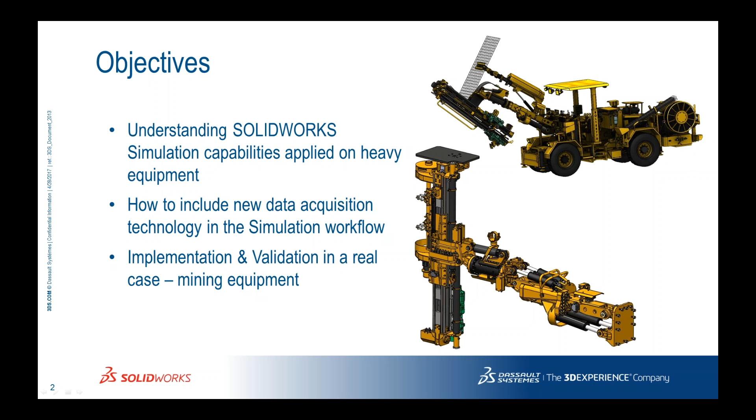We will analyze an example from Resemin. Resemin is our customer in Latin America, and Jose will present the platform and all the facts that the customer has developed with him. I will talk briefly about fatigue and fatigue inside simulation, then we'll hear directly from Jose.

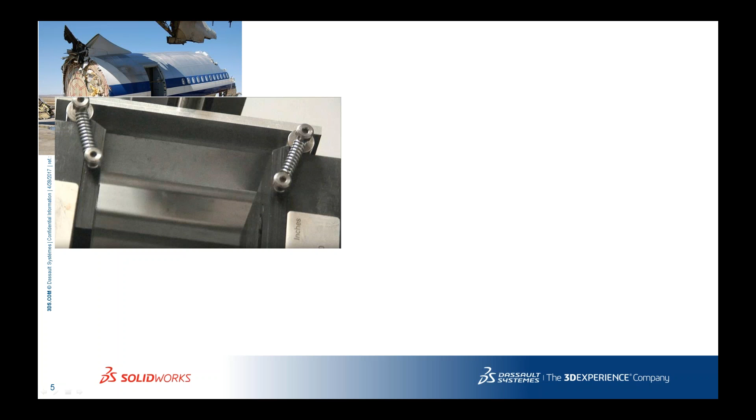Let's talk about the fatigue failure, the fatigue phenomenon. Basically, fatigue is an old problem analyzed back maybe in 1960. It's about failure after some cycles, after many cycles, in a steel structure. It was first analyzed when the first planes were having problems on the window because of the shape, and they developed a crack after some cycles, the cycle for a plane being about landing and taking off. But it's also related to machinery.

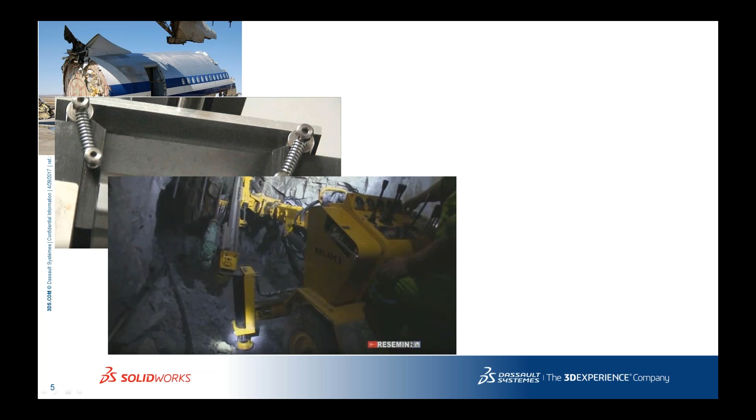Machinery, as in this example, what Resemin does, is about mining equipment. There are two main questions: how to simulate fatigue failure, and which are the locations of the fatigue. Of course, it's also related to time, to the cycles, how many cycles will develop this kind of fatigue. So it's very important to understand the real loading excitation.

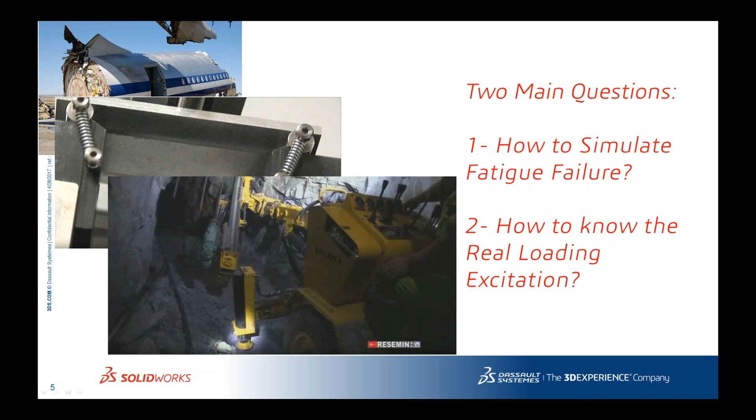Talking about Resemin, they are developing mining equipment for bolting, for making a tunnel secure. With these steel cages, they are bolting long bolts inside the wall, and basically they are drilling a lot of holes with this machine. When drilling, there is a lot of vibration going on in the steel structure, so there is a lot of issue with vibration and fracture of the main boom.

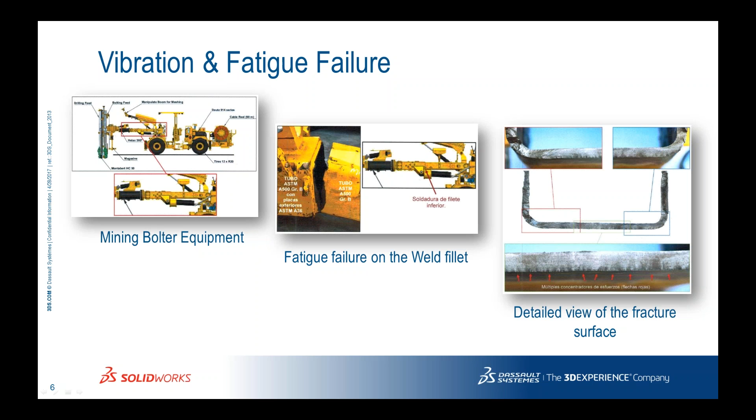It's called a boom, and there is a lot of fatigue problem that I have to solve.

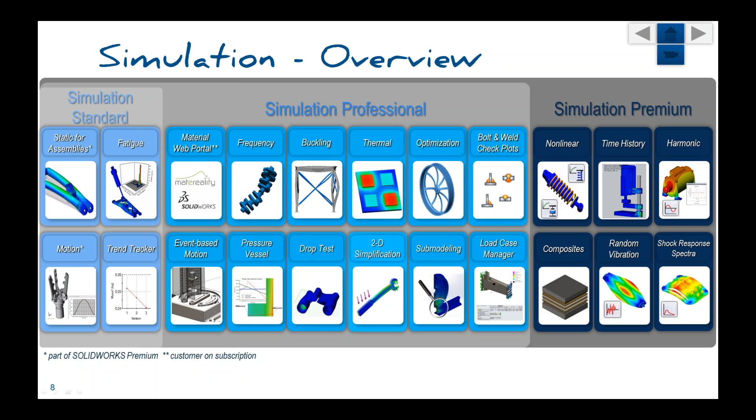In Simulation, there is a specific module for fatigue analysis, starting inside Simulation Standard. It's the very first package for simulation, and it's related to the Matereality Web Portal, because for customers on subscription we have more than 100 materials with the SN curve, called the Wohler curve, for addressing fatigue.

Fatigue analysis in Simulation Standard is very simple because it's based on the SN curve. It's very easy to use, as I will show you in a moment, and it's based on high cycle fatigue behavior. Basically we are addressing this problem when we have at least 100,000 cycles on the component, and we can get back a damage plot and a life plot.

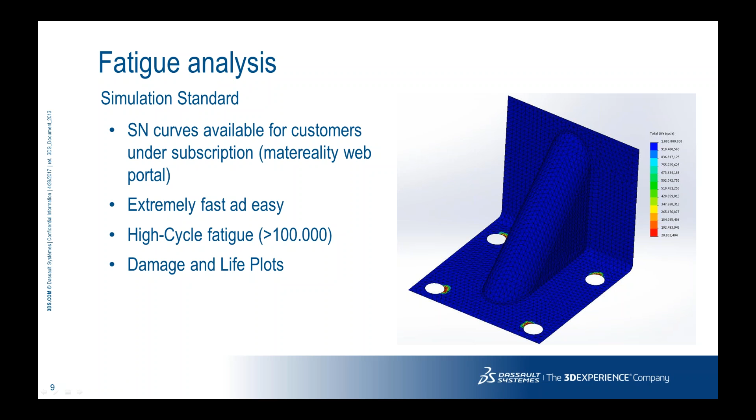For a simple case, fatigue is based on alternating stress loading. The first one is very simple, fully reversed load, about having the same load applied in one direction and then the other, cycle after cycle. The second one is pulsating, so basically we call it R equals zero, R0, because you apply the load and then remove it, cycle after cycle.

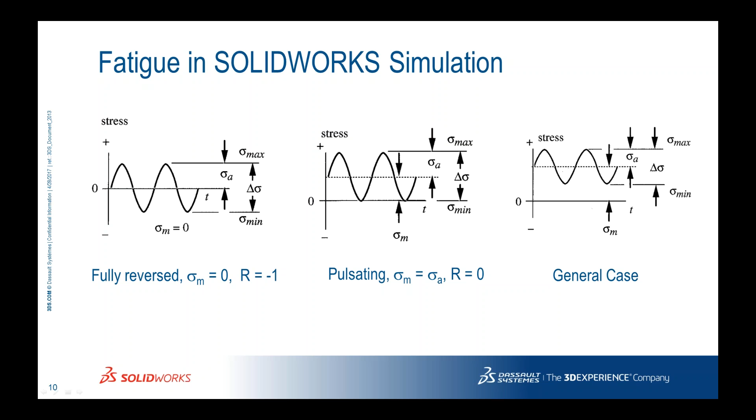We can also address the general case, the dead load, which is a static load plus an alternating stress. This is called constant amplitude loading. Of course there is a more realistic situation with variable amplitude loading, which we will see in brief with Jose and the case from Resemin.

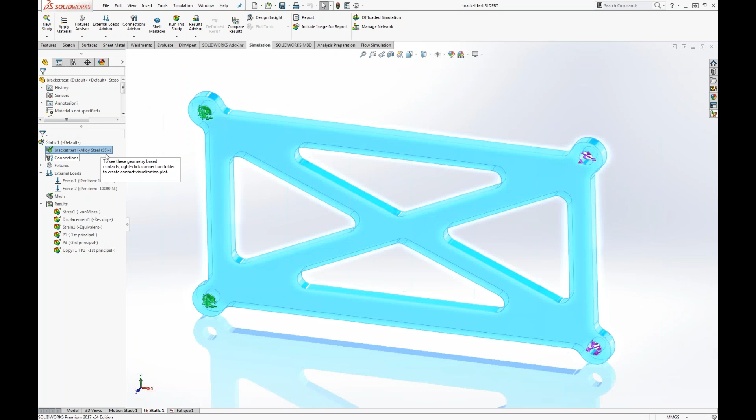Talking about fatigue analysis inside Simulation, let's see quickly the elemental analysis we can do. First, I have a bracket here supporting some load for some components, and here you can see just a static analysis. We have applied steel, basically an alloy, and we have two forces here, shown in purple.

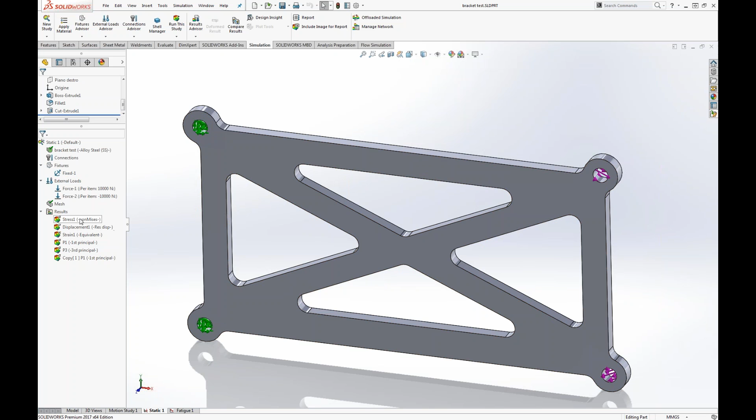It's very simple: one force is tensile and one is in compression. We also have a fixture here, you can see it's fixed, so those points, those hinges, are fixed. We can check the plots, the results, for example the stress, so it's quite intuitive to understand what is happening here.

I'm applying this load and this is the resulting stress, which is a von Mises stress. I can also see P1 and P3, the conventional maximum tensile stress and maximum compression stress. P1, of course, is tensile, and you can see it is mostly due to this point.

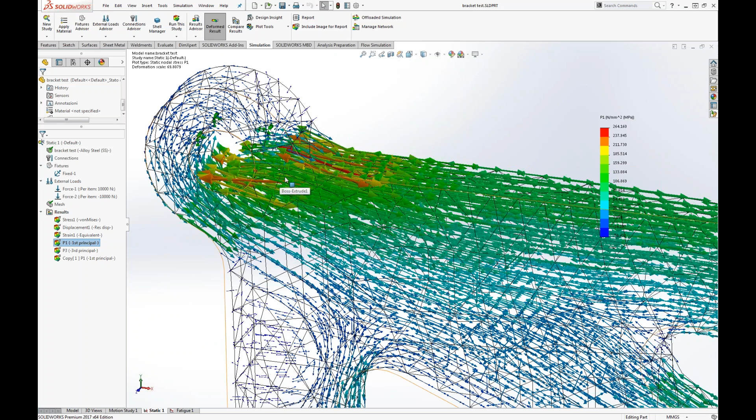Also, if we go to the third principal stress, the compression stress, you can see on the contrary, it's mostly on this point, on this location. Why is this important? Mainly for fatigue, the behavior is depending on tensile load.

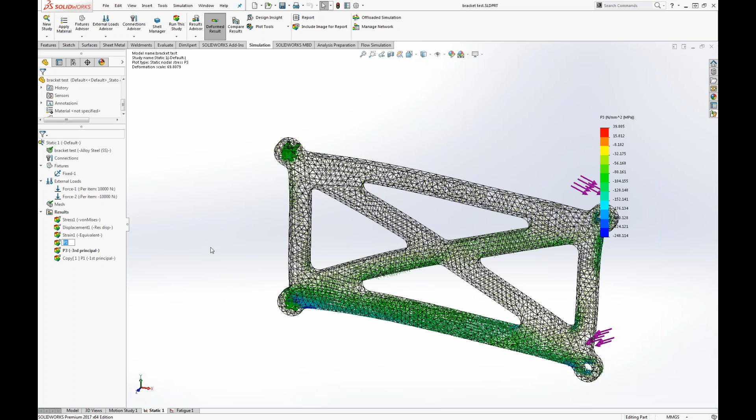So we will see in fatigue that it's mostly due to the tensile. Why the tensile? Because the tensile load is really developing the crack inside the component.

So how to create a fatigue analysis? Very simple, this is again constant amplitude loading. Here you can see there is an event. I can edit the definition, and very simply I can input that I want 500,000 cycles of this static analysis with a full reverse behavior. Very simple to do that.

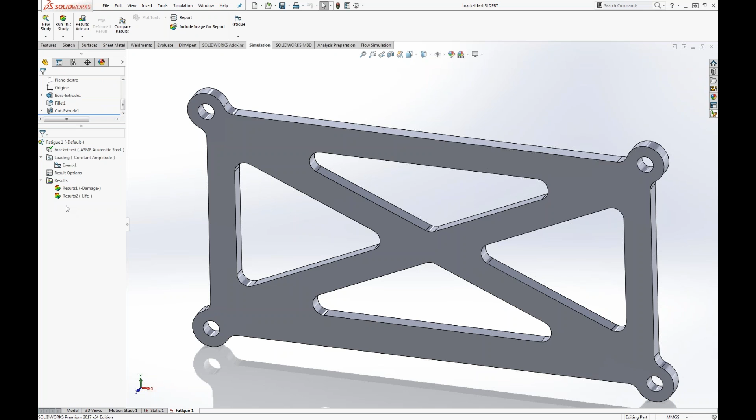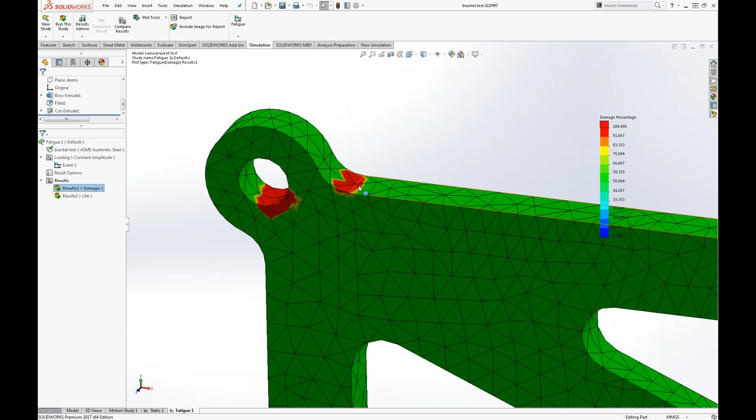So after that I can get some results. The very first result is damage, so damage occurring after 500,000 cycles. You can see in this plot most of the structure is damaged, let's say 50% on average, but there is a point here that basically has failed.

So after those cycles I know that it's already failed due to fatigue. When the component has failed, I can go to the plot of the life of the component, and it's very intuitive to understand that the minimum occurs after 71,000 cycles. So I get here the life of the component.

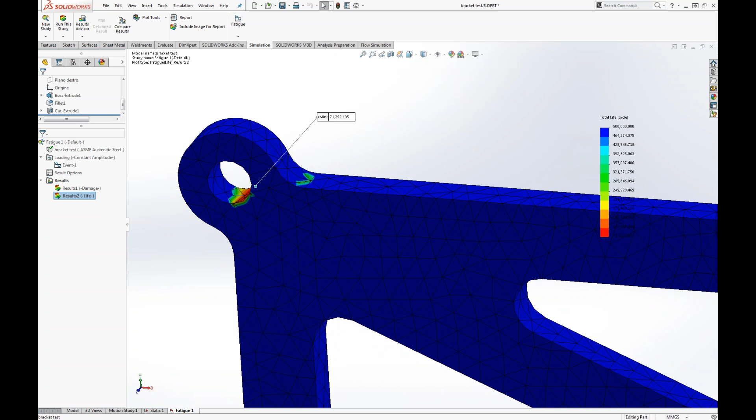So basically I know that there will be a crack in this position after those cycles, and then it will break due to fatigue. It's a very simple module, very easy to use, but again, going back to the presentation, this was constant amplitude loading, but in reality many times we have a variable amplitude loading.

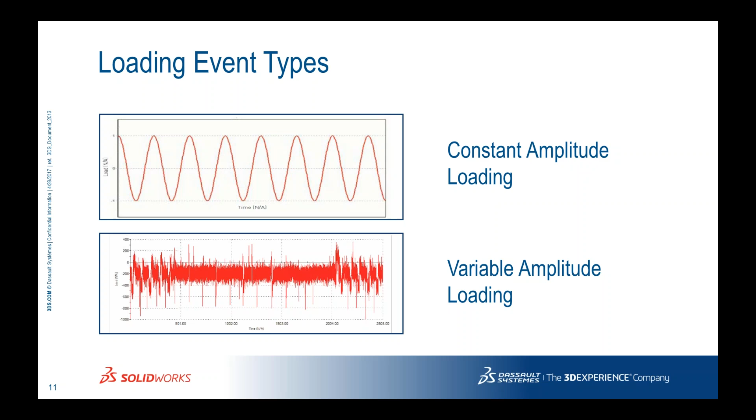Let's move on and talk about the previous test about Resemin. This is a customer again in Latin America. They were doing some tests, for example impact test on the equipment, on this cabin for the user. There is a specific test for this.

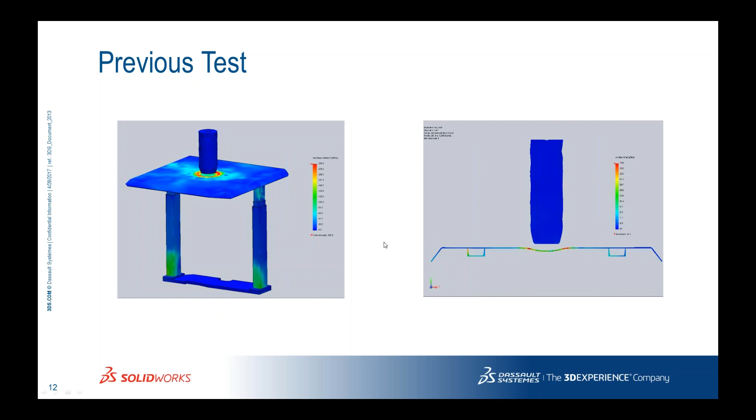Also some other tests, for example static analysis, motion, to see the loading and unloading of these bars, and so on. So they made a lot of tests. Also this one is very nice, about the movement of the barrels, of the head that is drilling the holes in motion.

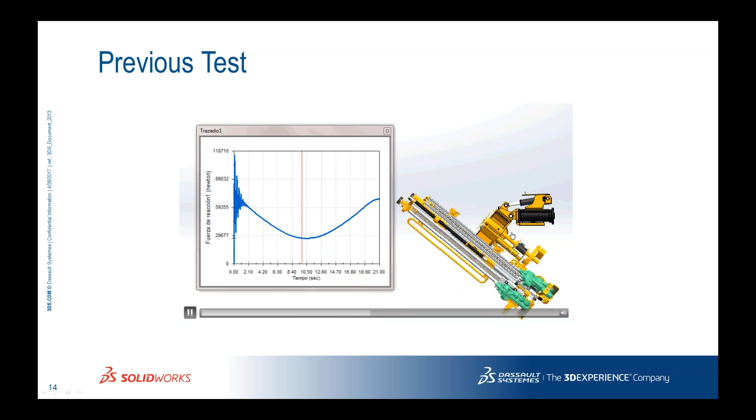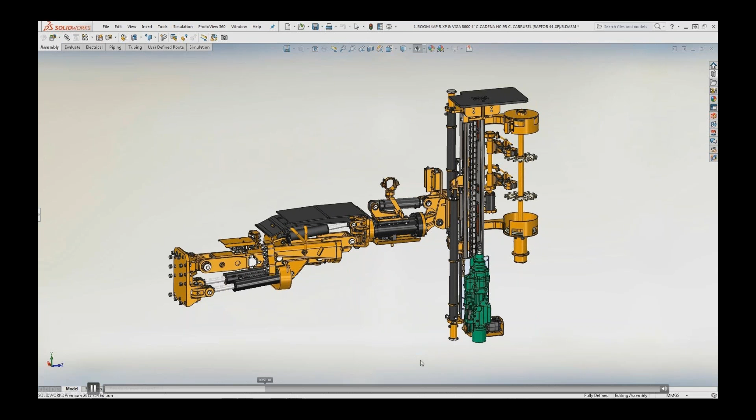Also we can see here the simplification process made for analyzing the fatigue and the vibration on the main, let's call it boom—this is the boom of the assembly. And so they went through a simplification here, of course. Let's see in a moment.

So they removed, for example, these hydraulic cylinders, and they removed of course all the bolts. Let's skip this part. And so this is the actual model they used for simulation.

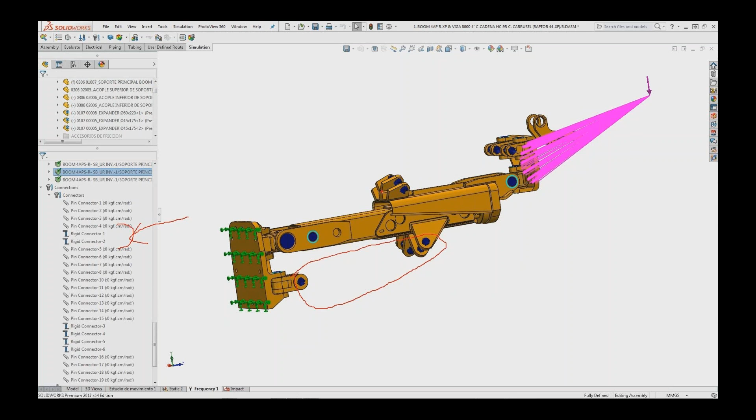You can see there is a remote load here that is basically the drilling head. Here you can see they removed the hydraulic cylinders, because basically the behavior is a link, a rigid connection between those portions, and so on. So finally they got this kind of model to work on.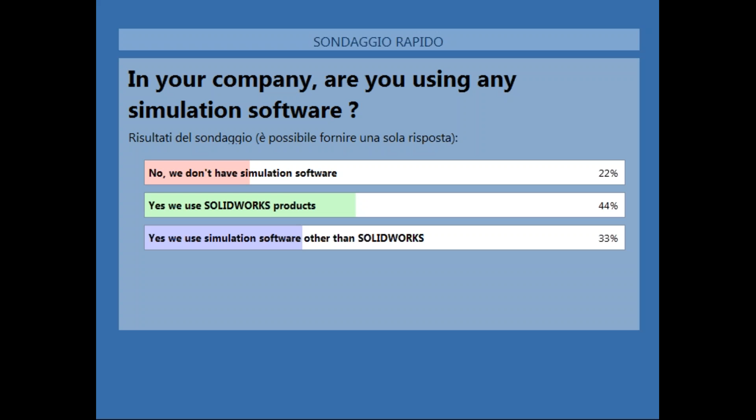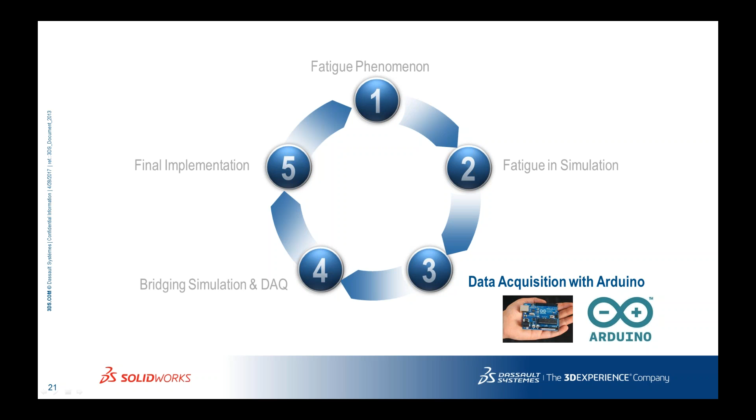Okay, let's go on. So now we'll see with Jose the rest of the presentation about Arduino and data acquisition. Jose, are you ready? Yeah, let's start with data acquisition with Arduino.

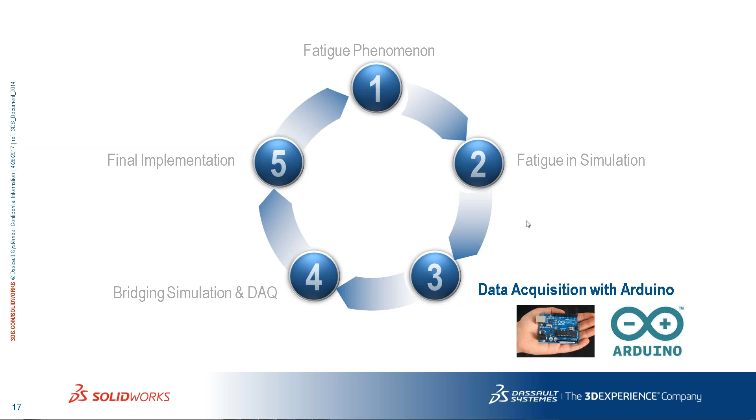Okay, perfect. So what is Arduino? First of all, Arduino senses the environment by receiving input from many sensors. In this case, we use Arduino with accelerometers, only accelerometer, in order to have acceleration and study those accelerations, as we will see in our models.

Second, Arduino is an open source electronic platform based on easy to use hardware and software. This is an advantage from other alternative electronic platforms, because if you have an open source platform, you can think in your device that accomplishes all of your requirements, as we did.

Finally, you can tell your Arduino what to do by writing code in Arduino programming language and using the Arduino development environment. I have to say, I am not a specialized programmer, and I started using Arduino as it was a kind of Visual Basic, a basic C, C#, whatever. So all of those three parameters, I think, make Arduino successful for this kind of implementations.

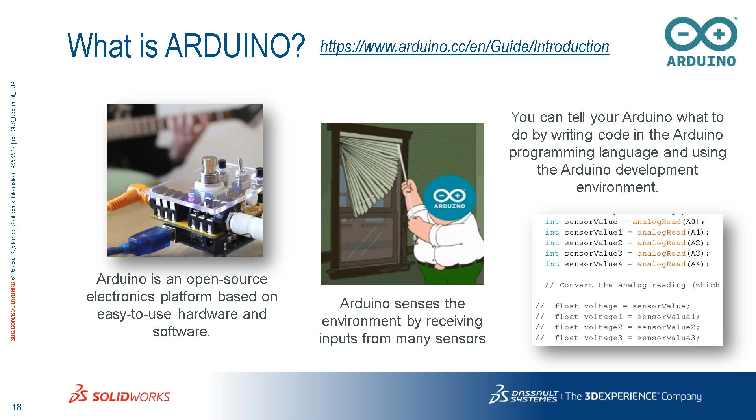Okay, about the data acquisition, what is our motivation? Some simulation models need more detailed loading input data. When I say that, I mean you already saw the model from Alessandro. Alessandro already knew the loading, but in many cases in the real world, we don't have those patterns of loading. So it is needed to know the load pattern, which is already an unknown for the analyst.

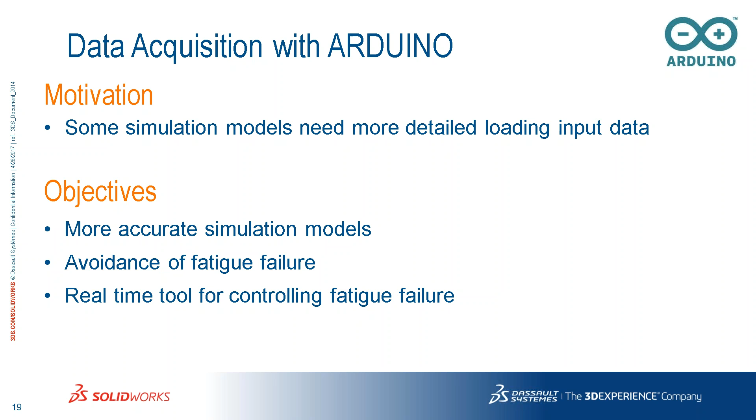And about the objectives, we have three objectives. First, more accurate simulation models. Second, avoidance of fatigue failure. And third, real-time tool for controlling fatigue failure. This last one, the real-time tool for controlling fatigue failure, actually was our biggest challenge with the customer. And I will show you in a moment how we did that.

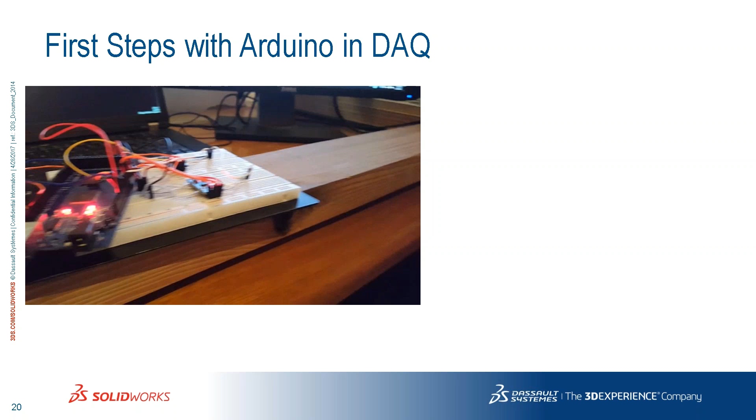Okay, let's start with our first steps using Arduino. As I said, this is our first implementation, a very basic implementation. You are seeing there a beam of wood with the Arduino Mega 2560. And when I hit with my hand, you can see the vibration in the beam.

And that vibration is already recorded in a very accurate way, because we are having not only the shape of the frequency, the period of the frequency, we are already having the damping, right? What we have from Arduino?

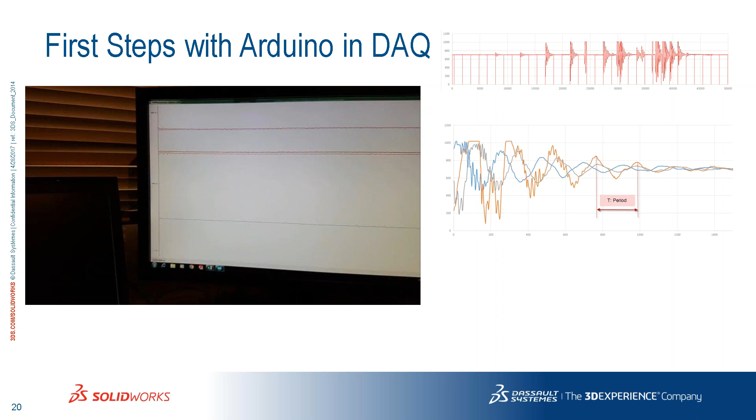We have that signal, we post-process that signal, and we get the frequency, and in this case it is 39 Hertz. If you saw the result from Alessandro, when he showed the frequency from the machine, the first frequency was 38 Hertz. So that very simple example shows that we can use Arduino for getting real world case frequencies.

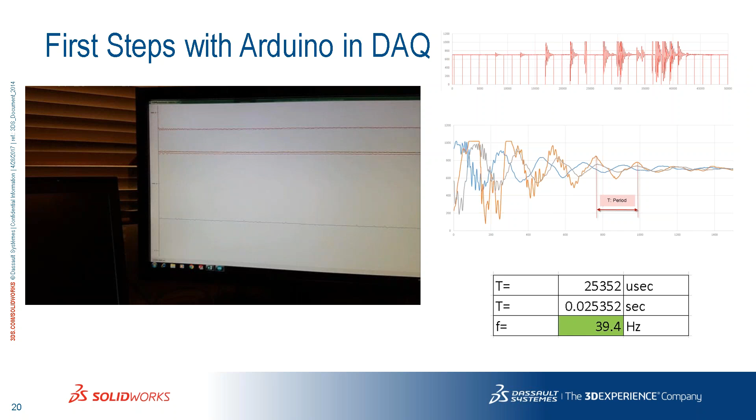So let's move on with the shape of that beam. What we did with Arduino, actually, we got only—I would say this totally fits our requirement—we got the three first natural frequencies. Those are 40 Hertz, 143, and 431 Hertz.

But with SOLIDWORKS Simulation, we can not only verify those three frequencies, we can also have the frequency mode shapes, in the case of mode 1, F1, F2, and F3. So what I want to mean with this kind of plot is that you can combine all the technology from Arduino in verifying what are the real world frequencies, and including SOLIDWORKS Simulation in order to have a deeper approach in your analysis. So this is a very simple example.

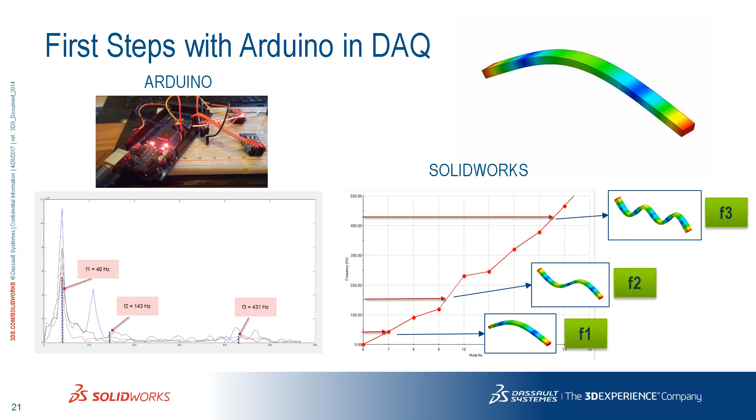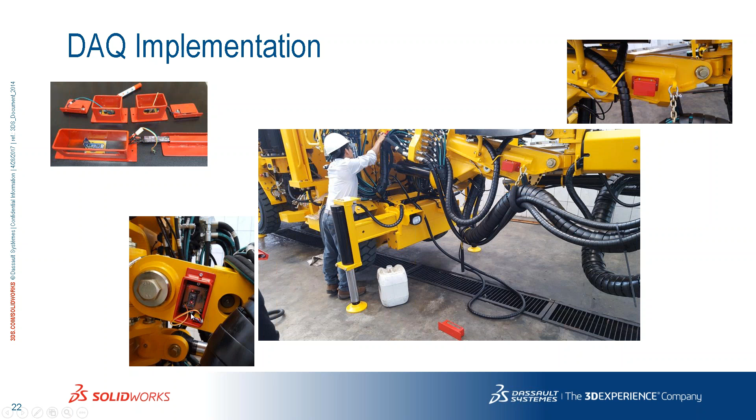So let's see now a lab test, a real world lab test.

As you can see here, we are drilling a block of concrete, and right now we are acquiring acceleration. I will show you in a moment. In those red boxes, we have two accelerometers, accelerometer 1 and accelerometer 2, and we are sending the signal through Bluetooth receiver.

This was actually our first implementation. Right now, we improved that implementation, and we are recording all the acceleration in the memory card.

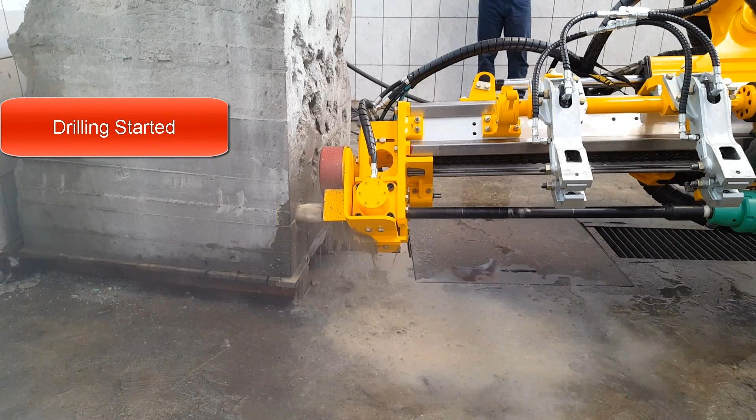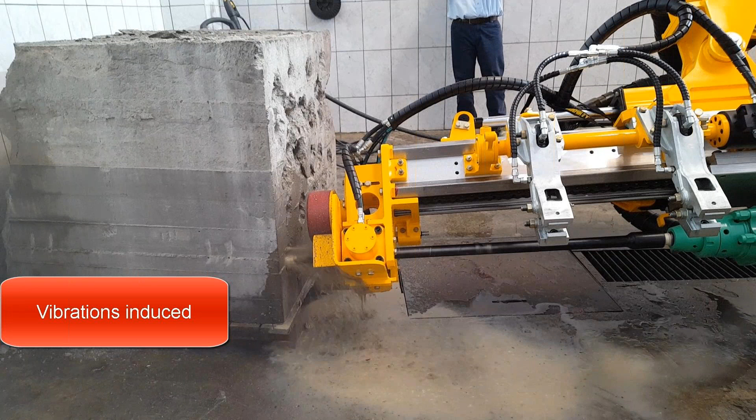As soon as we started drilling with a frequency of 48 Hertz, we can see the movement of the machine. Actually, that vibration is causing the fatigue failure. So imagine more than 2,000 kilos drilling at 48 Hertz is a very hard loading on the machine.

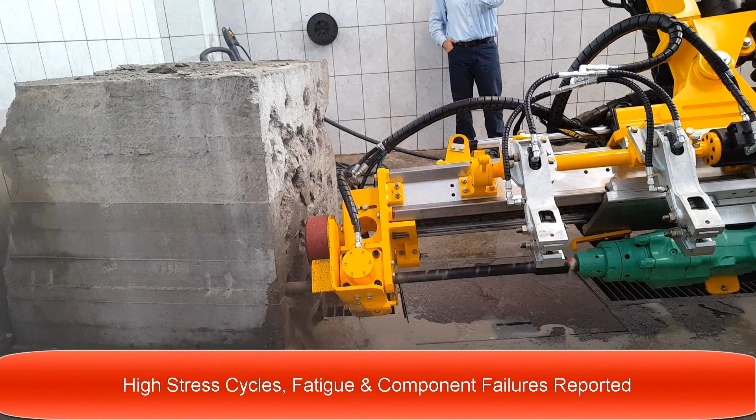So high stress cycles, fatigue, and component failure are reported, yes, in the mine. In this case, of course, we didn't have any failure because it was a lab test, but after doing this, we recorded the data from Arduino, and we got these 3 plots.

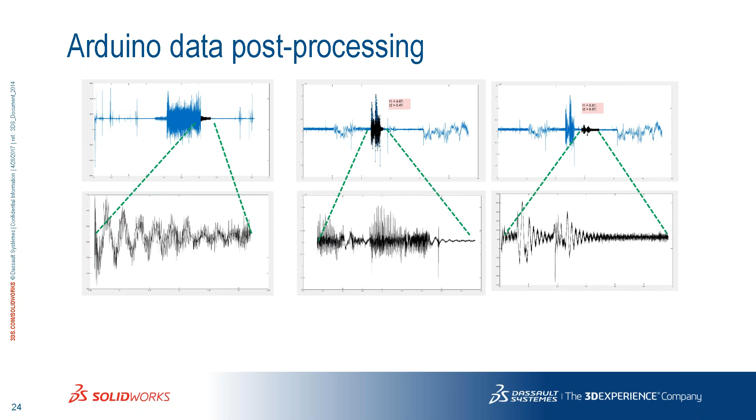As you can see, I guess nobody can guess what the frequency is. So what we did here is just take a moment in the signal where the drilling was started, and after post-processing this signal, we get that number. This is, I would say, the main number that Alessandro already showed, the 38 Hertz.

That number, 38 Hertz, verified with SOLIDWORKS simulation is the same. We are getting the same result. So at this point, we are very confident with our result.

I have to tell you the truth. When we started analyzing our model in SOLIDWORKS simulation, we didn't get 38 Hertz. We got another number, another frequency. So using Arduino helped us to adjust our simulation model, and finally we got very good shape results.

So let's move on now. How we bridge the SOLIDWORKS simulation and data acquisition.

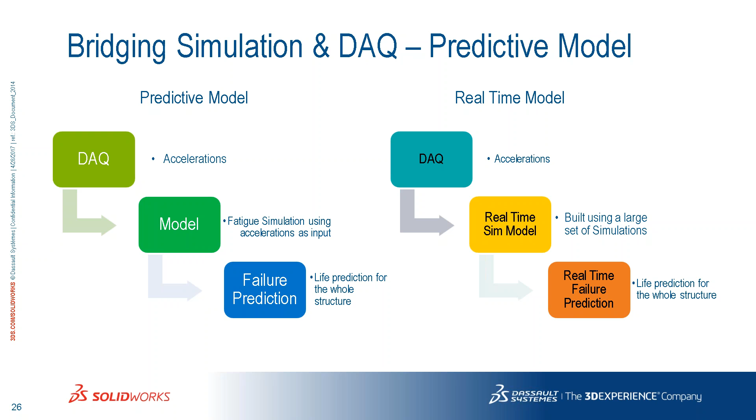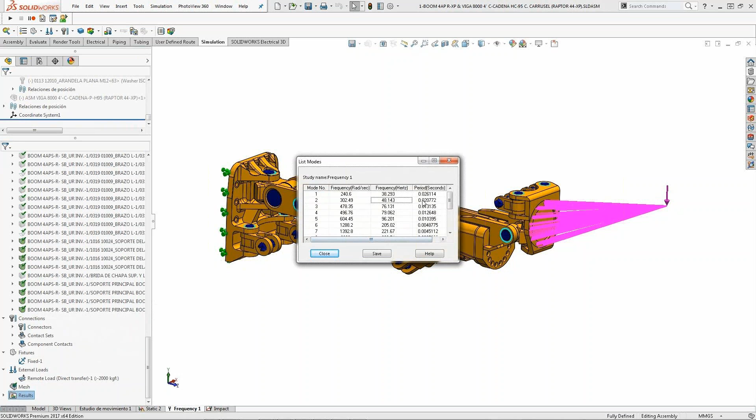So in order to show the implementation, right now I'm showing you what I'm going to do now, getting the natural frequency from the model. This is already known, the natural way to do it in SOLIDWORKS simulation. You can get the frequencies and the period of your model. So nothing new, still nothing new.

There, on your left, on the top, you see what we already developed. This is an API. API is Application Programming Interface.

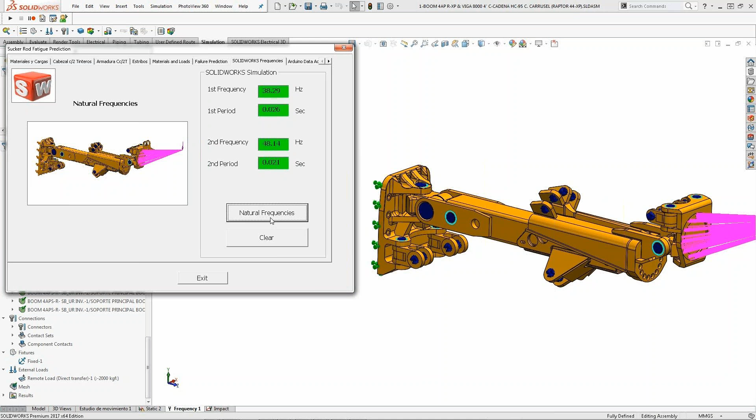The very beginning use of this API is in order to get, in an easy way, the two natural frequencies from simulation. So, up to now, what we did is very simple: just a button and getting the two natural frequencies.

Let's move on now with Arduino. Actually, now we are connecting with Arduino. Arduino in our model is printing a file, and we are getting those frequencies from Arduino, the two natural frequencies. Actually, Arduino is not only calculating and getting the result, it's also calculating the natural frequency.

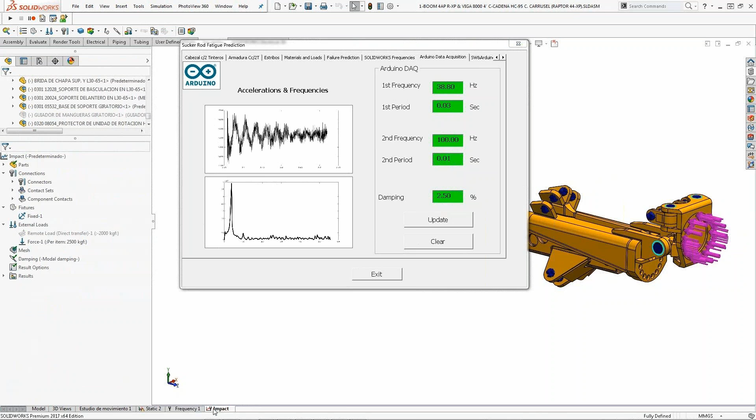Many times my customer asks, Jose, how can I get the damping? In this case, we are getting the damping with data acquisition. This is another use you can do with Arduino.

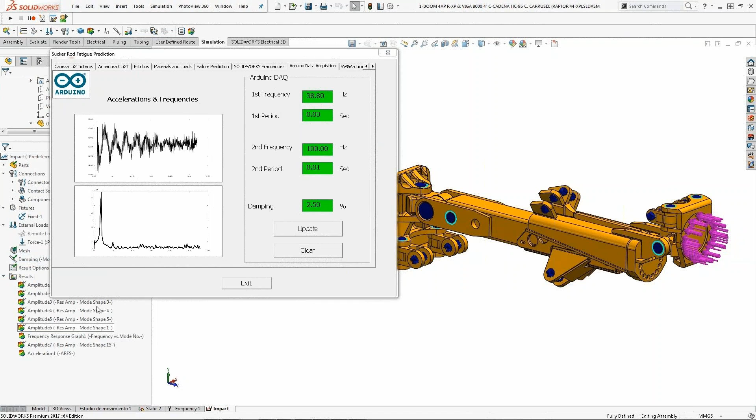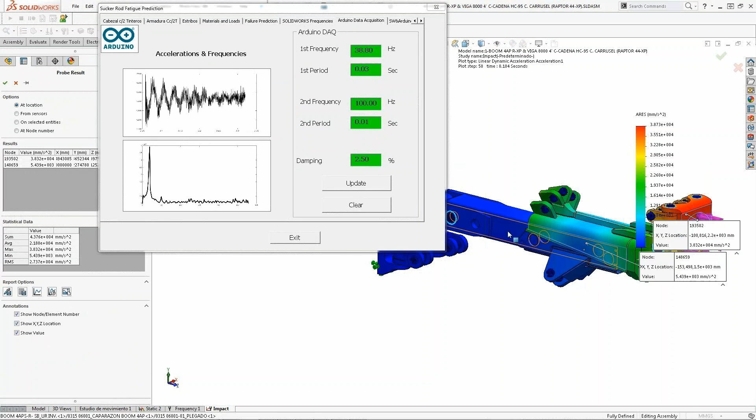So it is very important when you are running a dynamic simulation, because in order to have accurate results, you have to have the damping factor. So this is one way, a very good way, to have the damping factor. Of course, you have books, you have internet sometimes that can help you, but from my point of view, this is the most accurate way to get the damping factor.

And also we have to say that it's very cheap to have this kind of data because of the Arduino open source platform, and those kinds of sensors are not so expensive.

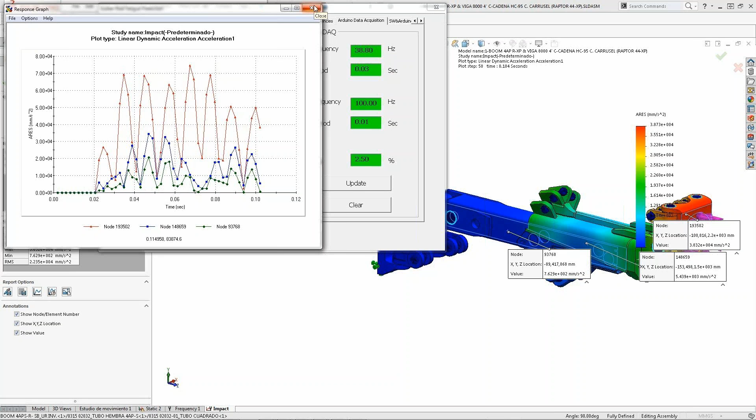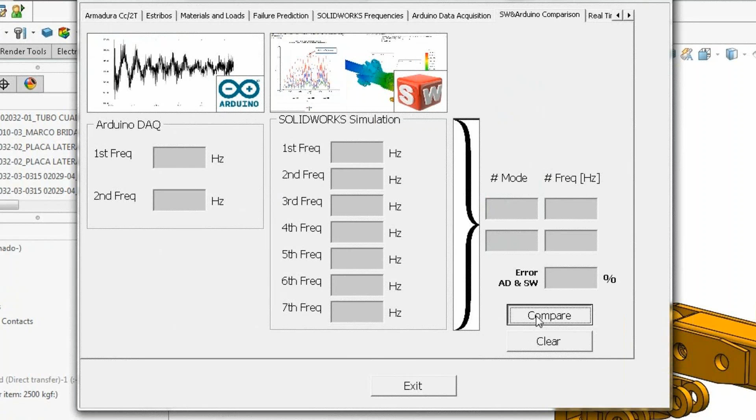This is a very good highlight, because when we started with regular electronic platforms, I remember the prices. It cost almost $10,000, and with this implementation we spent I would say $500 to complete this implementation. So as you said, Alessandro, Arduino makes the difference also from the price point of view.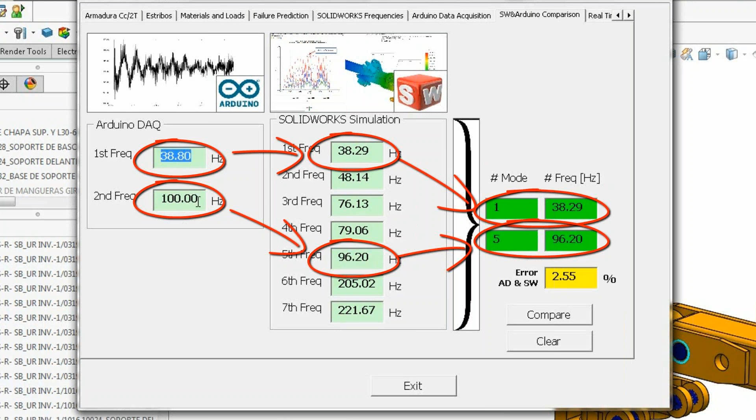Now what you are seeing here is the real bridge between Arduino and SOLIDWORKS simulation. We are identifying from SOLIDWORKS simulation what are the real natural frequencies that are excited by the loading. This could be a nightmare for an analyst if they don't know anything about the machine, as when we started analyzing this device.

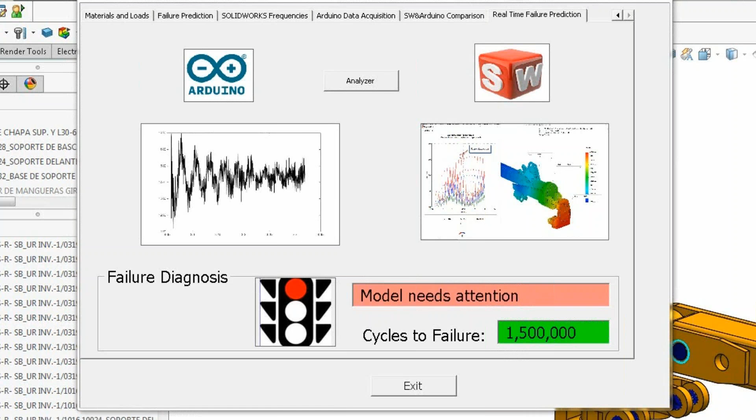And finally, we developed what we call the analyzer, the fatigue analyzer. As you can see, the analyzer is saying in real time that there remains only

1,500,000 cycles to get a failure. And for those who are using Arduino, you may know that in Arduino you are connecting to the serial port. In this case, we are connecting to the serial port directly from SOLIDWORKS simulation. So that allows us to process in real time this acceleration data, having the real time tool in our

SOLIDWORKS simulation. Also, I have to say, it is not needed to run a simulation in order to get the result. With this kind of API, you can have this API running, connecting to your simulation results, and you are getting a standalone tool on your machine, of course.

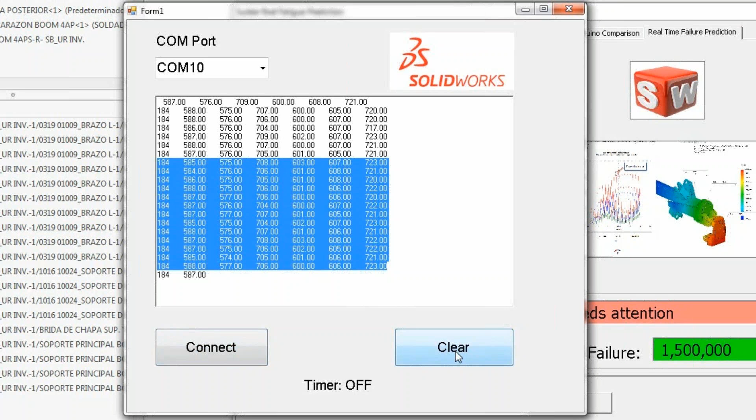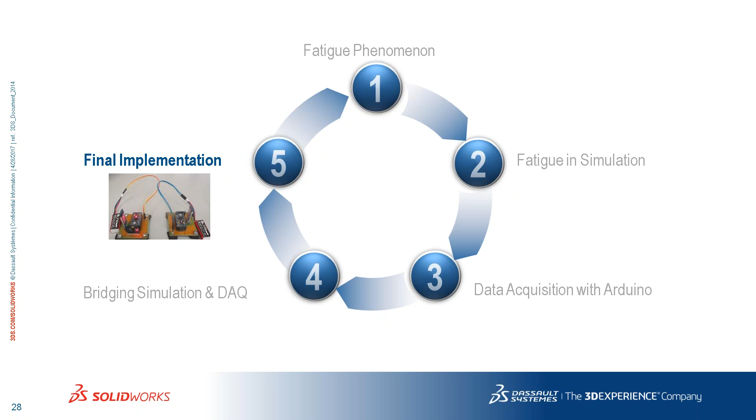Okay, let's see some details for those who are interested in the implementation. The final implementation was done with Arduino Pro Mini. When I say Arduino Pro Mini, the size of this, it fits in half of the hand. So it is very, very small, and you can put it in

almost every machine. About the accelerometer, we started with an analog accelerometer, but finally we got the MPU 6050 accelerometer. This is a digital accelerometer, and this allows us to get acceleration at 4 kilohertz. That means, imagine that if the machine is at 38 hertz, getting results at 4 kilohertz is much more than needed. So it is very accurate for every kind of application we can imagine in machinery.

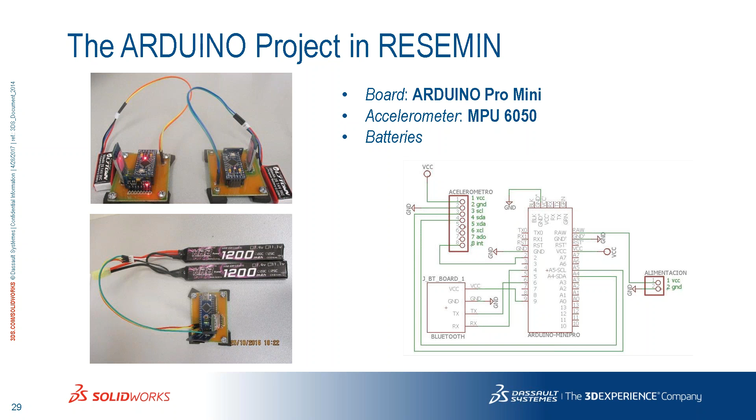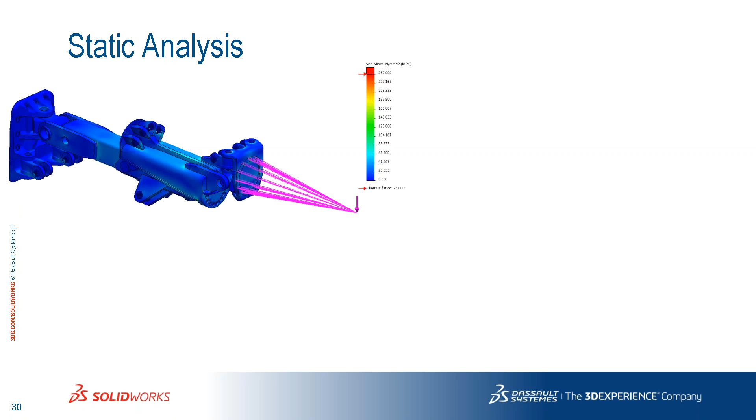Finally, following the same workflow that Alessandro did with that bracket, we started with a static simulation in SOLIDWORKS. We identified what were the most stressed areas, and finally got results from the static point of view.

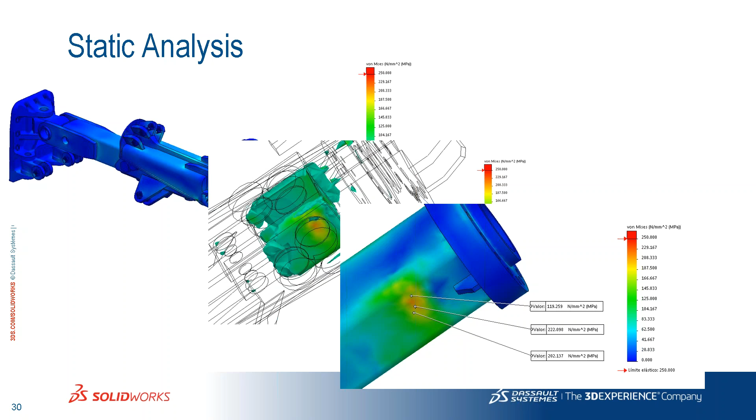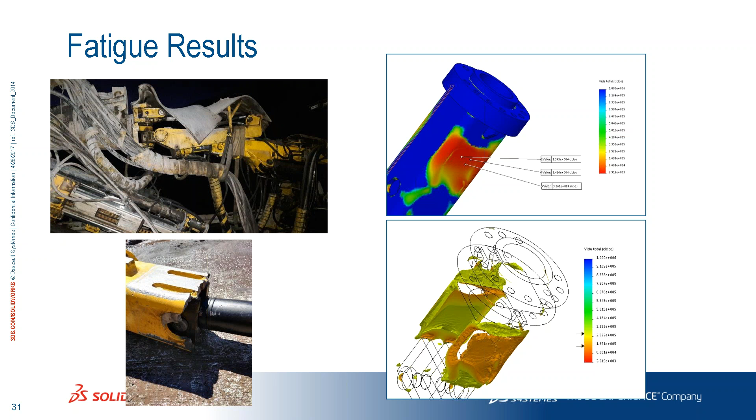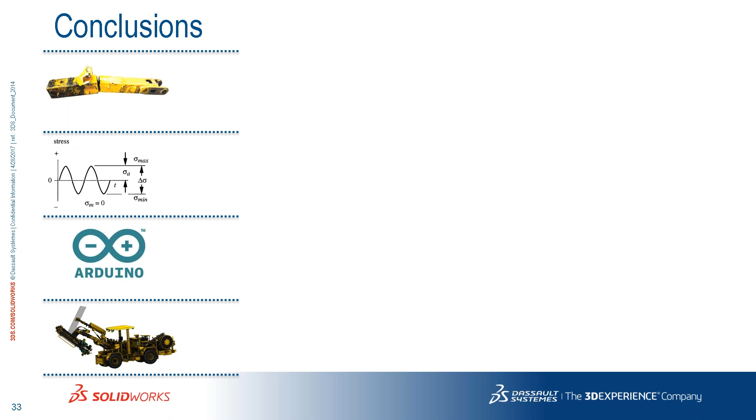Regarding the product, Alessandro already talked about the product, and finally, I would like to finish with Alessandro talking about conclusions and finally questions. Okay, thank you, Jose, very much.

I'm switching into my screen. Okay, so to finish up this webinar, basically, as always, I'm pointing out the value of virtual simulation, as we saw today for this case, but for other cases as well.